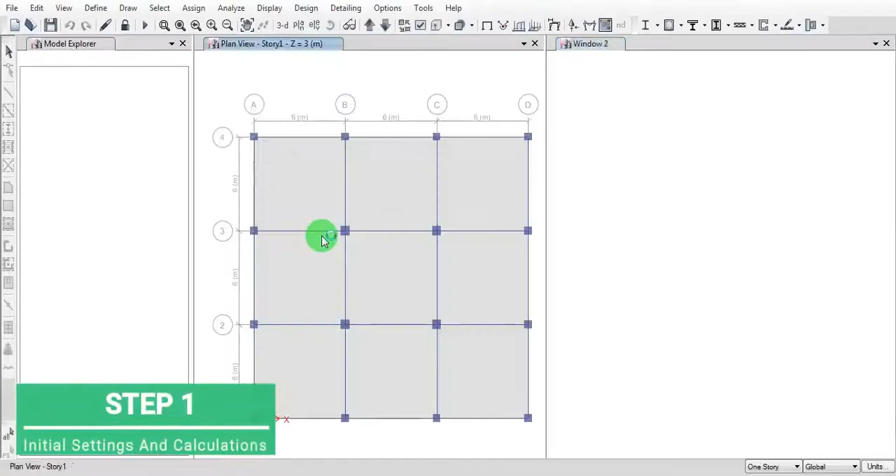Open the building which we ran the analysis for, the tall building. This is the model we created already. Then go to the tables, analysis and results. Then frame results, click on the column forces. Then arrange in story 1. Here we want only dead load cases.

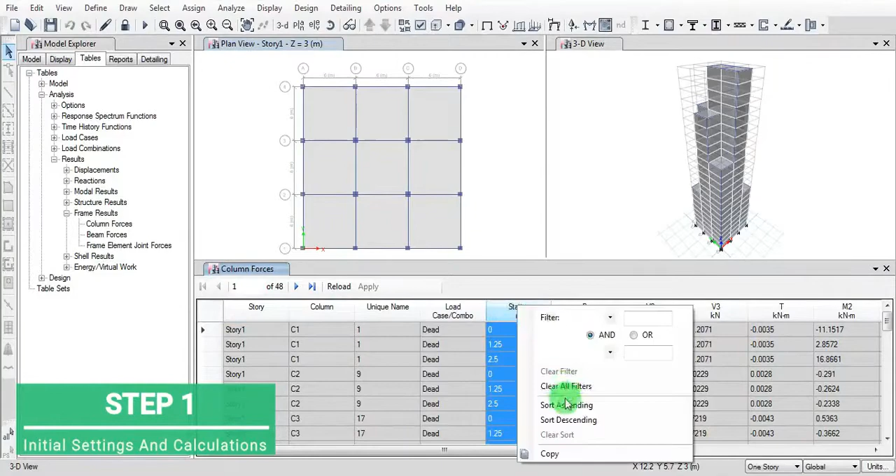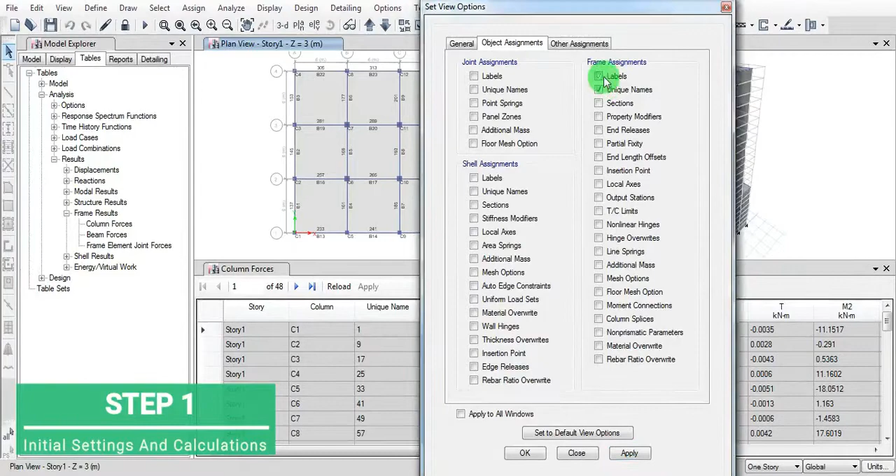Then sort ascending. These are all the columns, C1 to C16. And then we have to know the column numbers here. To display the column number, go to the view option, set view options, click on labels and click on apply. Here we see all the column numbers like C1, C2, C3, C4, C5 up to C16.

Now go to the structural object and story 1. Here click C1. Here you get column sizes. Click on all the columns. Here you get all the details of the column sizes. There are 2 column sizes, 500 by 500 and 600 by 600.

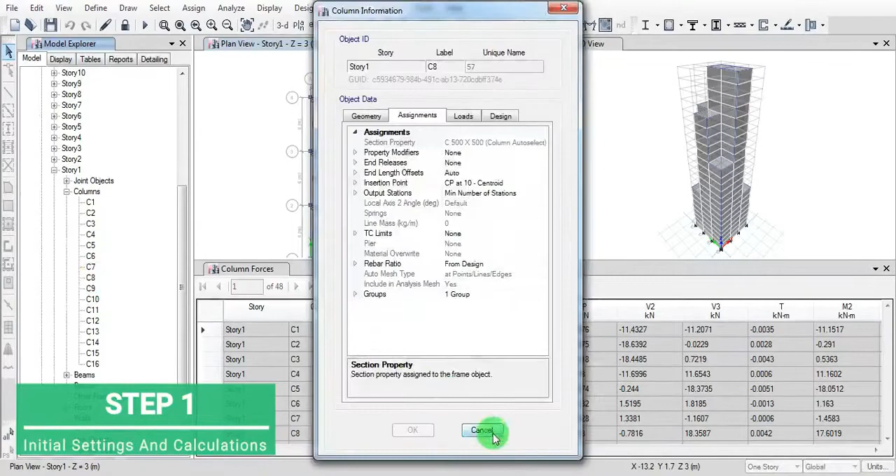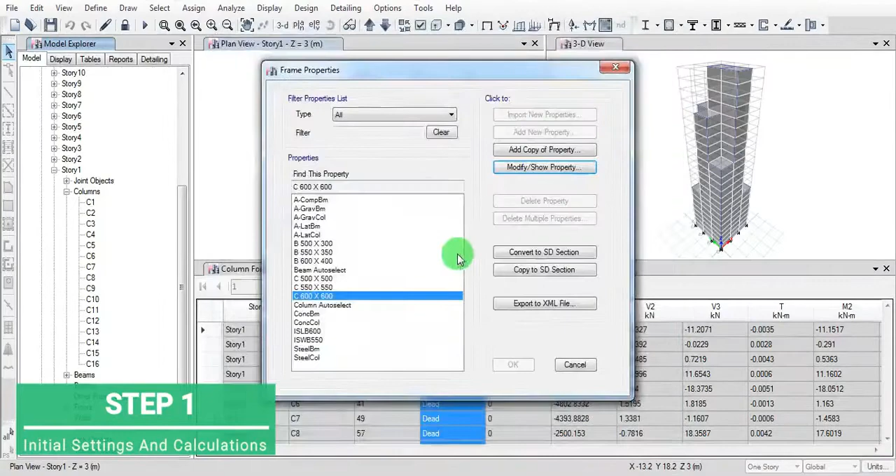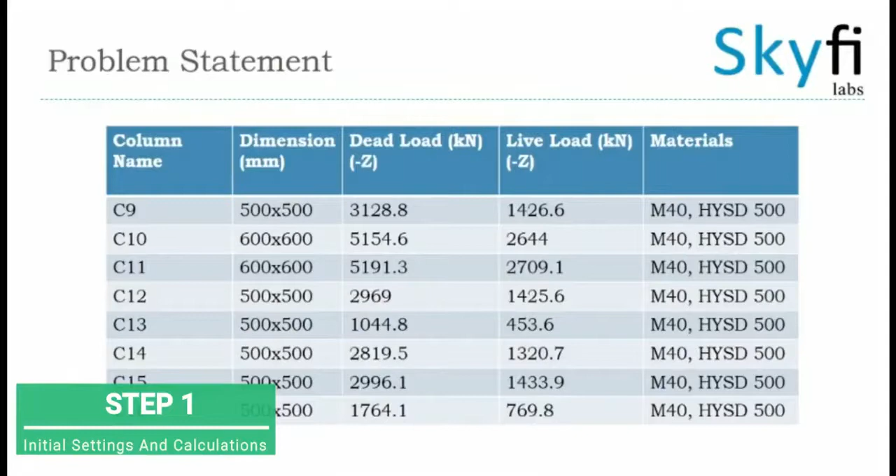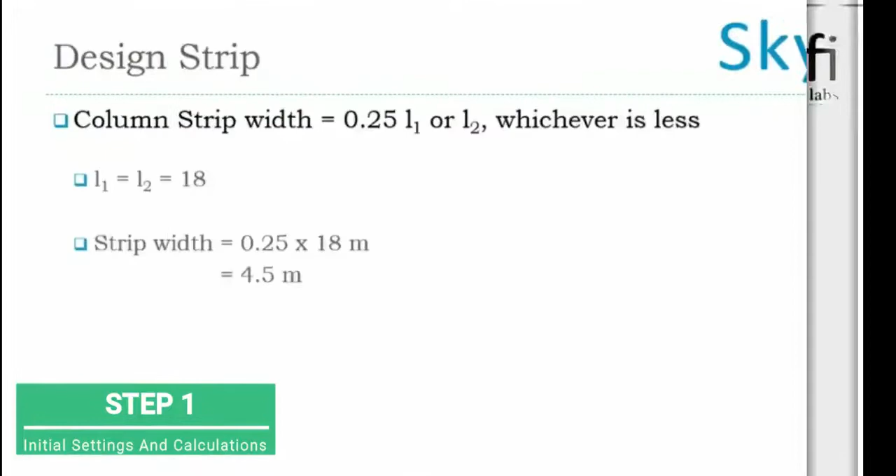Now go to the SAFE software and set IS456. Then add the cover and rebar options. Then set the grids. We have 18 meters, so there will be 19 grid lines in both directions. Now set 1 meter. This is how we got the grid.

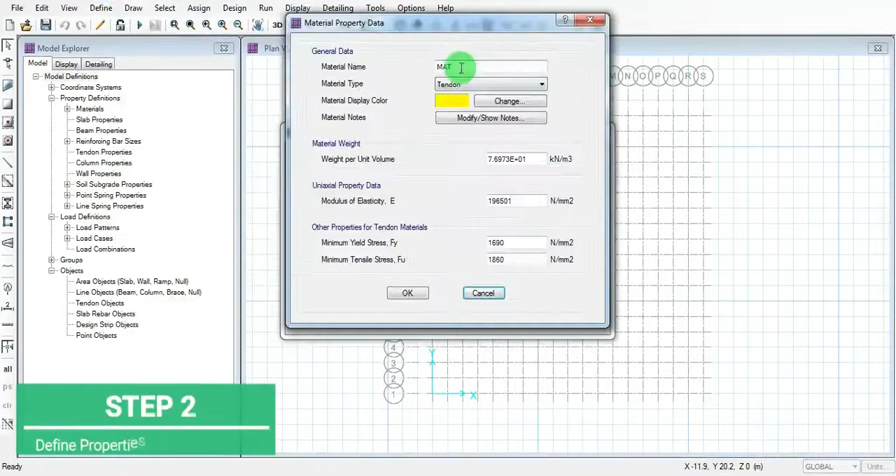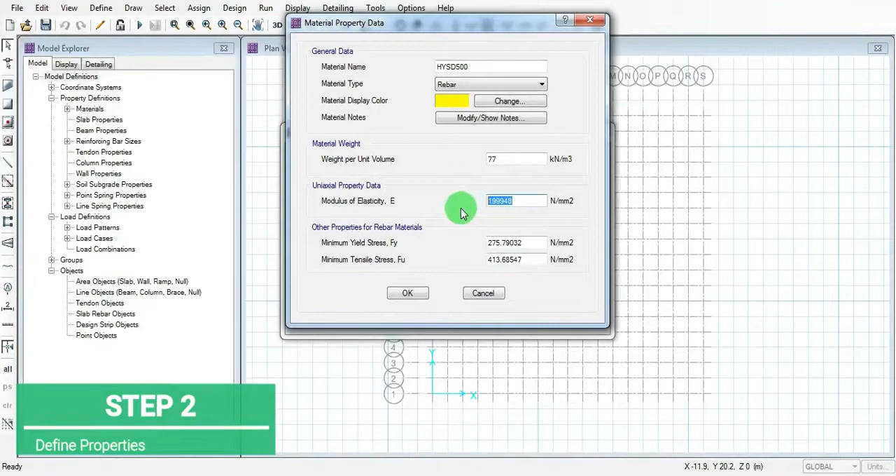Then go to the material, define material M40 concrete and add all the standard values for M40. Click on OK. Then add a HYSD 500 bar and add its standard properties. Then go to the slab property, add the slab property for the mat footing, which is M40. Add the thickness 500 mm.

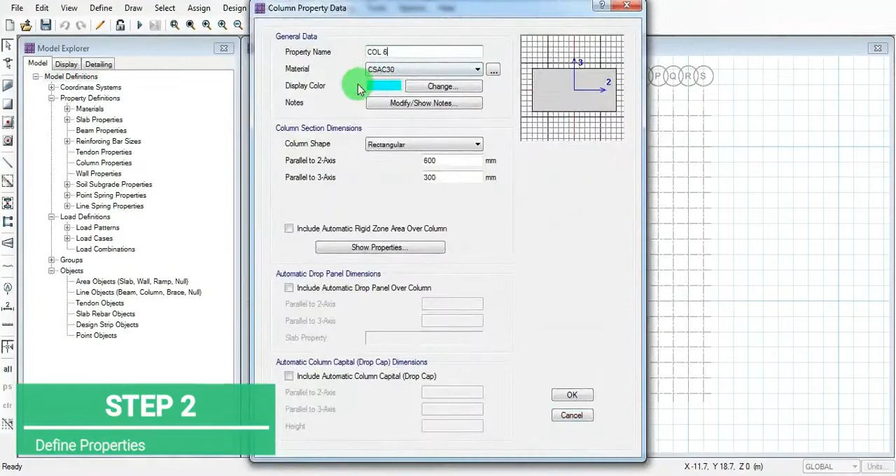Click on OK. Then define the column property, add a new column, column 1. We have 2 columns, 500 by 500 first. Add its sizes 500 by 500, click on OK. Then another column 600 by 600 and click on OK. Now add the soil property, soil. We have 3 × 10^4.

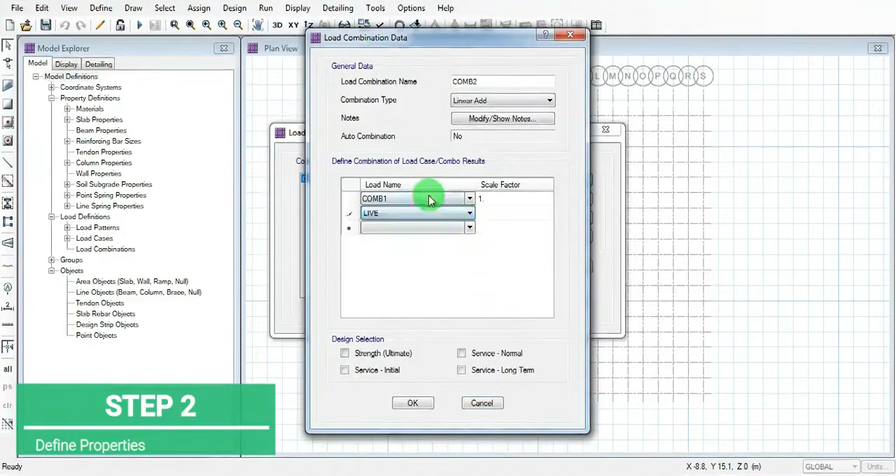Load cases, check load. Then add the load combination for the ultimate load. Now add for the service. Click all the service options and click on OK. 2 load combinations are added successfully. This is how we have to draw the slab. The slab has been drawn.

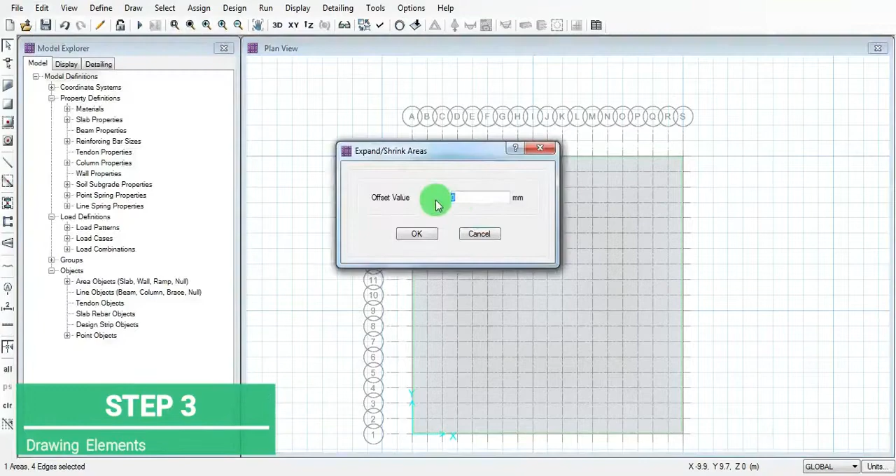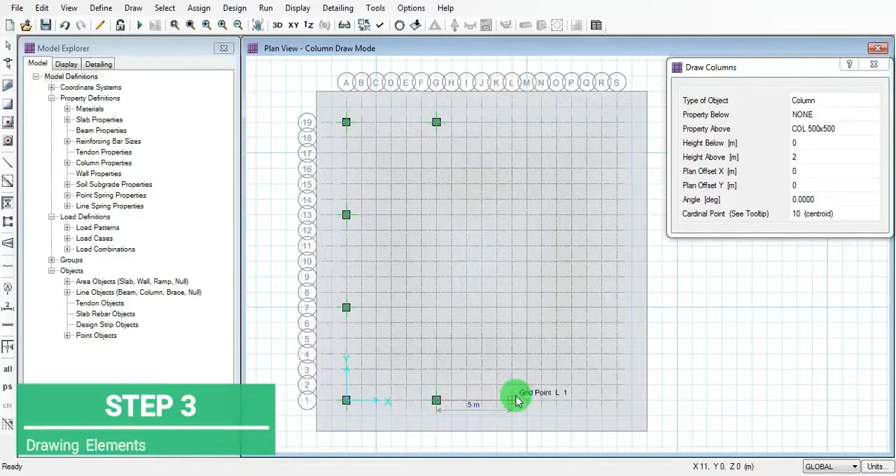Then go to edit. We have an extension of 2 meters on either side for all. We got the offset. Now draw the columns of 500 by 500 mm, 6 meters apart. Locate all the columns of 500 by 500 mm at the initial stage, then add the 600 by 600 columns at the center.

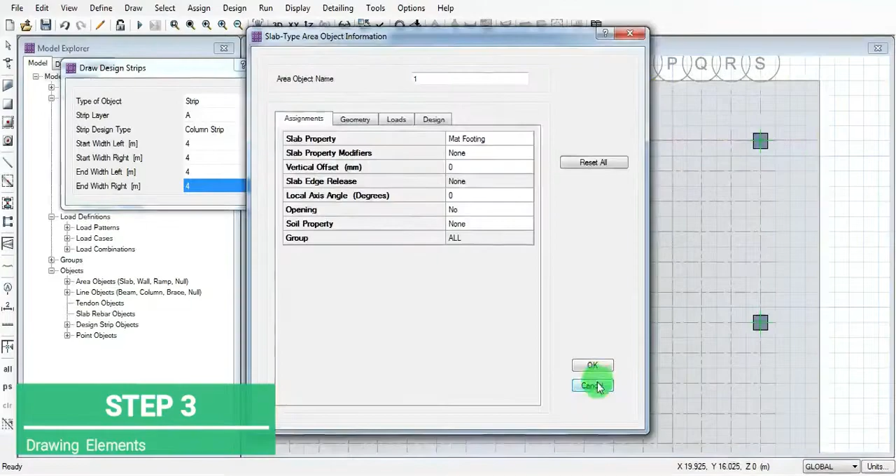Then add column strips, which have a 4 meter width. Draw all the strips in layer A. Then in layer B, add the strips, 4 strips in Y direction.

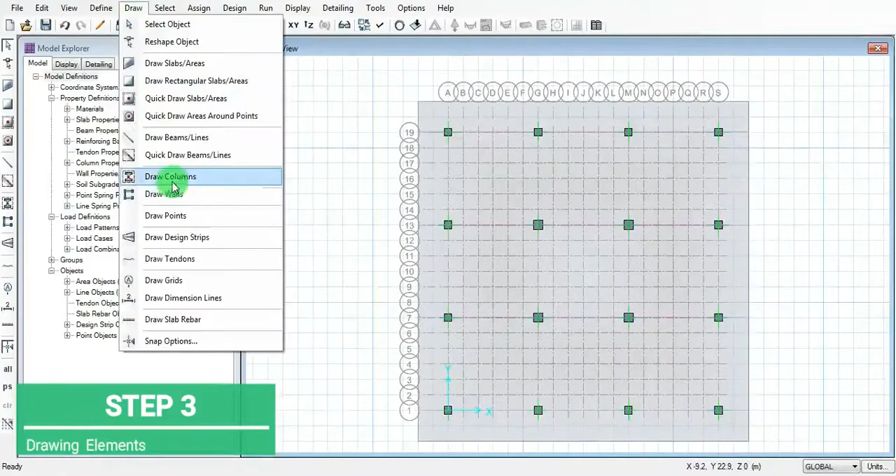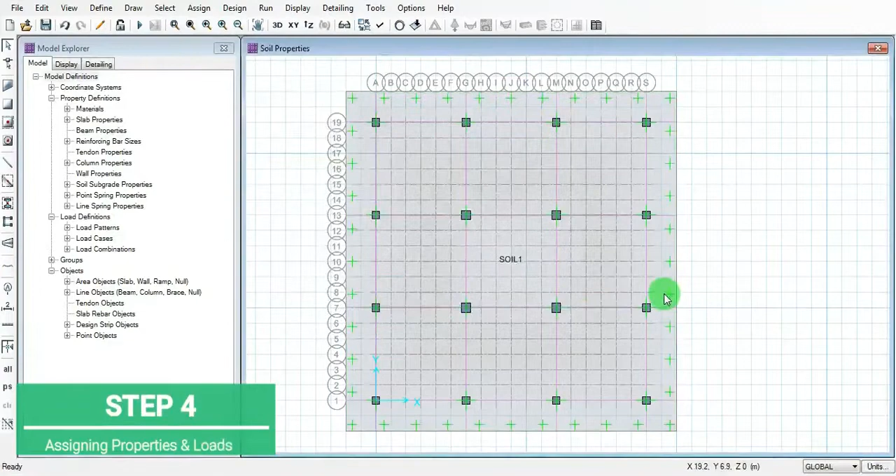Done. Now click on the footing area and add the soil property, that is soil 1. Then add a load on a column, the dead load for the 500 by 500 column. Then add a live load, which is 797.6. Then in a similar way, add all the loads for the 500 by 500 columns.

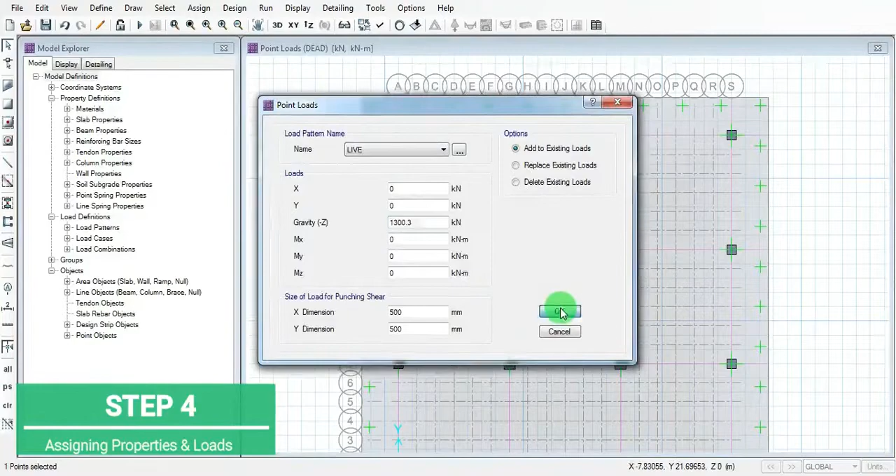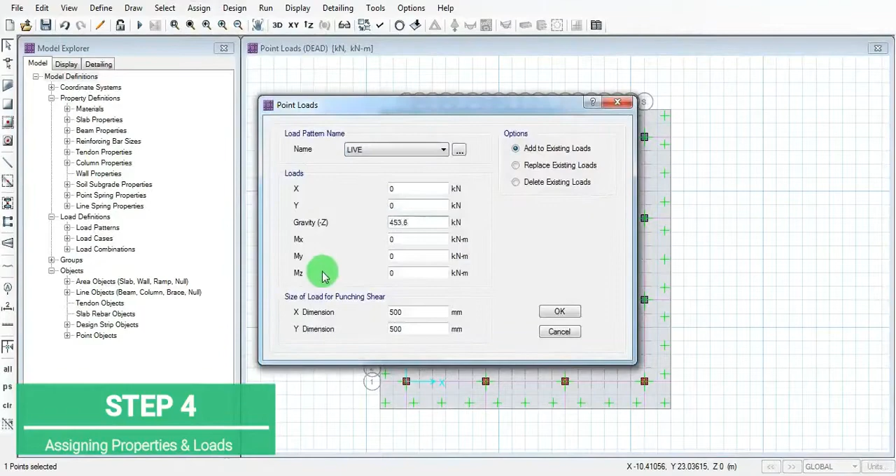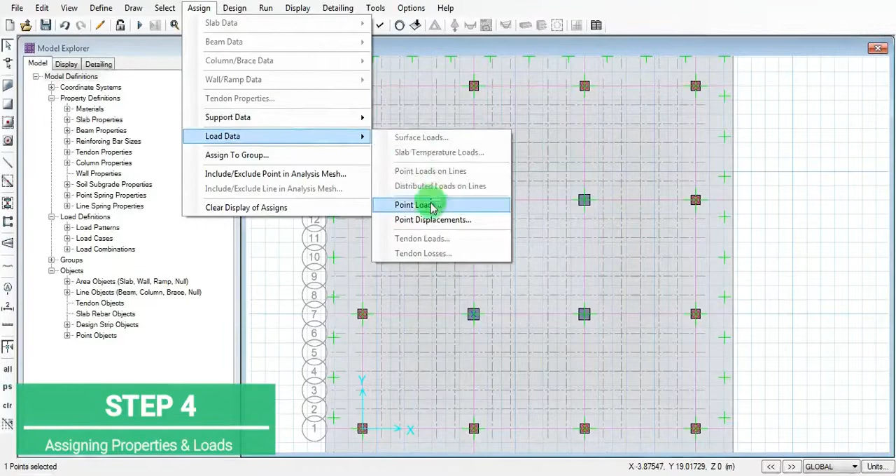Here the 500 by 500 columns are C1, C2, C3, C4, C5, C8, C9, C12, C13, 14, 15 and 16. Done. Now we added all the loads for the 500 by 500 columns. Then add a load on the central portion, that is for the 600 by 600 columns. Add a dead load and live load in a similar fashion as we did for the 500 by 500 columns.

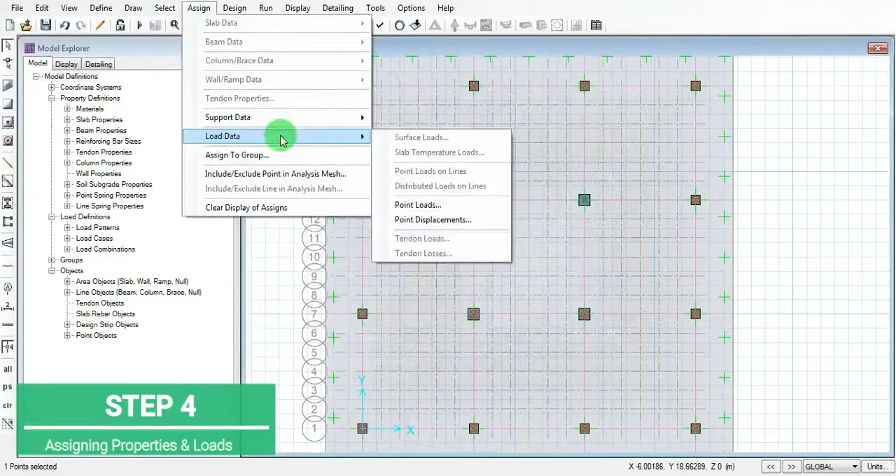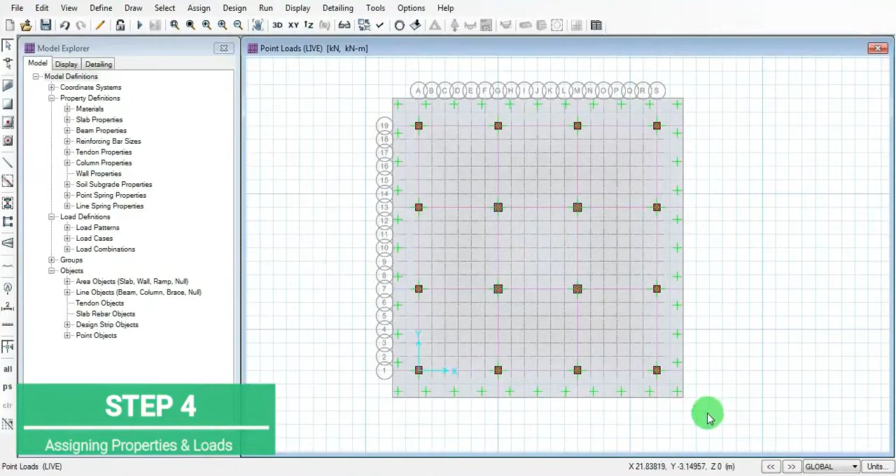Now we successfully added all the point loads. Then we have to assign the rebar properties. Click OK, we are checking. Now select our footing, add rebar options and add HYSD 500. Then click on the strips and add all the rebar properties. Click on all the strips of layer A and layer B.

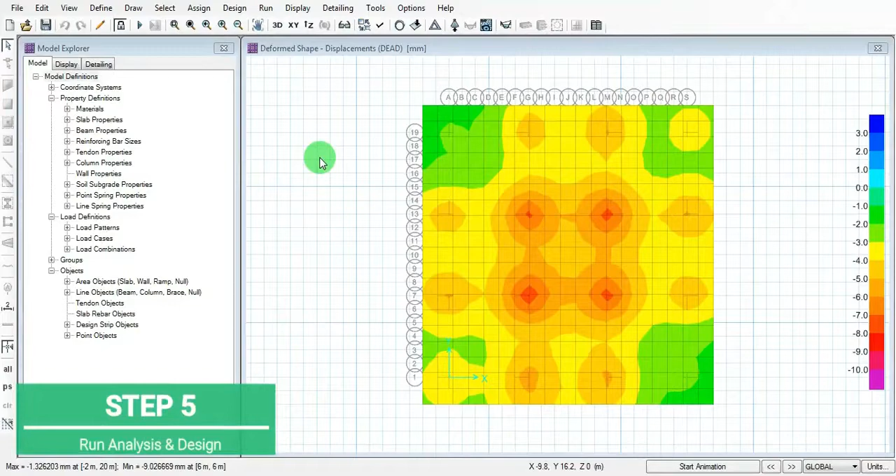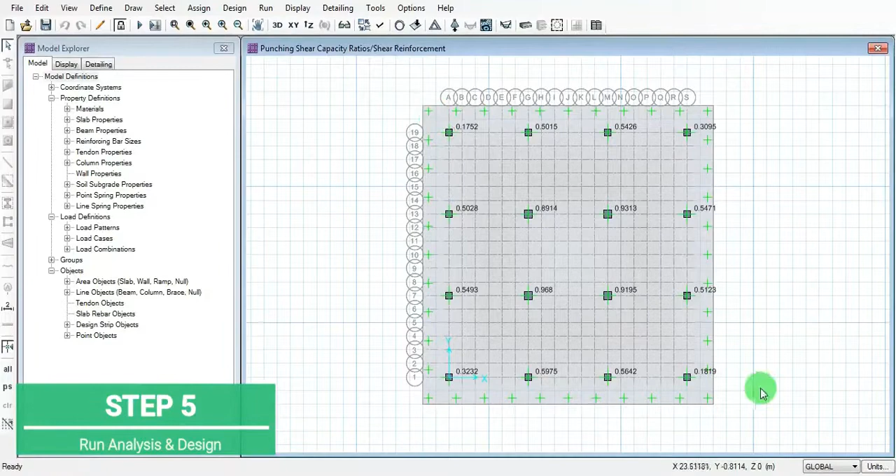Done. Now run analysis and design. Now click on the punching shear options. The punching shear is getting higher, so we revise the thickness, going to the slab property. Again we are getting a higher punching shear, so we increased the thickness to 1200, then ran the analysis again. Now we got a punching shear value less than 1.

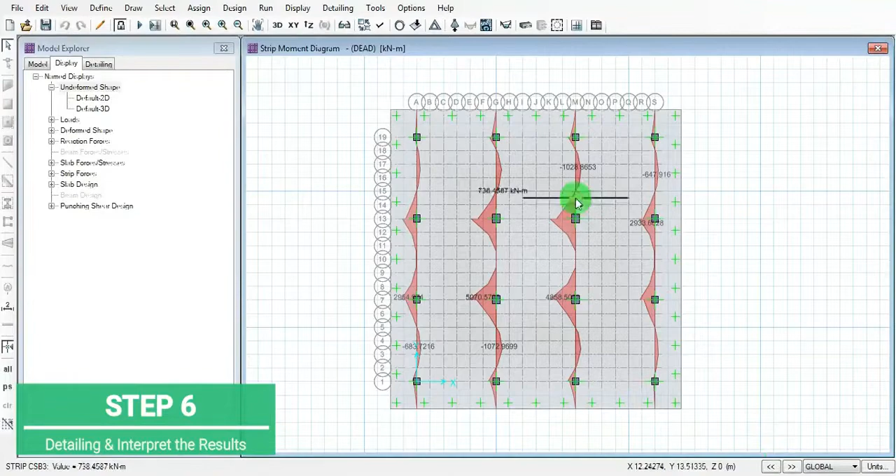Now view it in 3D view, extruded option. This is the plan view again. The next part is to view the different load combinations. Before that, strip forces in layer A and B. Now get the imposed reinforcement. Now similarly in layer B for load combination A. This is the crack width values for the slab top and bottom.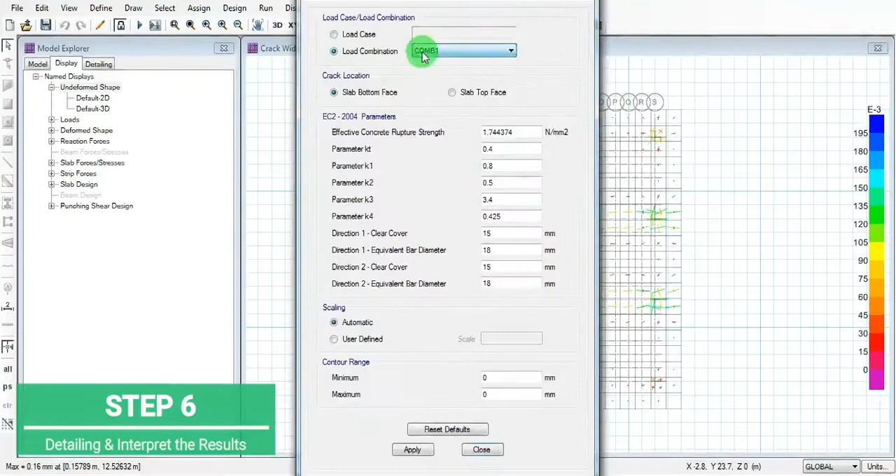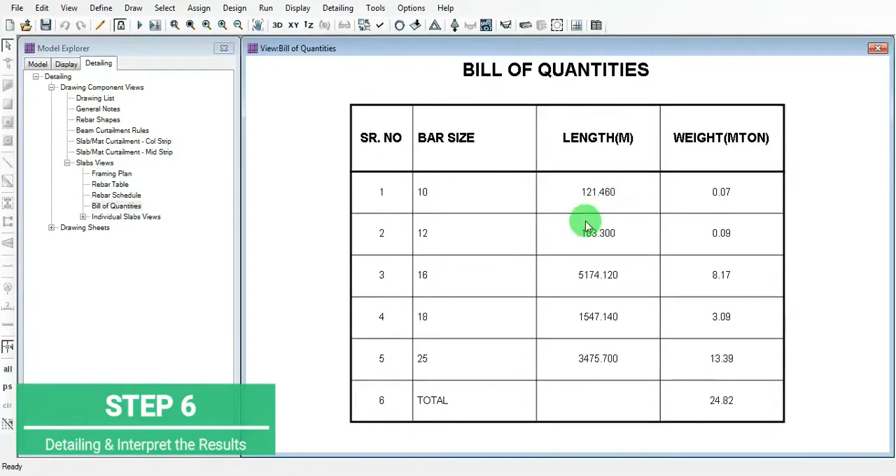These are minor cracks, and start the detailing option. This is the detailing framing plan. Go to the framing plan. This is the framing rebar table, bill of quantity, having all the lengths of the rebars with bar size. These are slab plans like rebar plan, top plans, rebar plans for all bars. This is section at 1. And this is the section reinforcement profile for layer A.